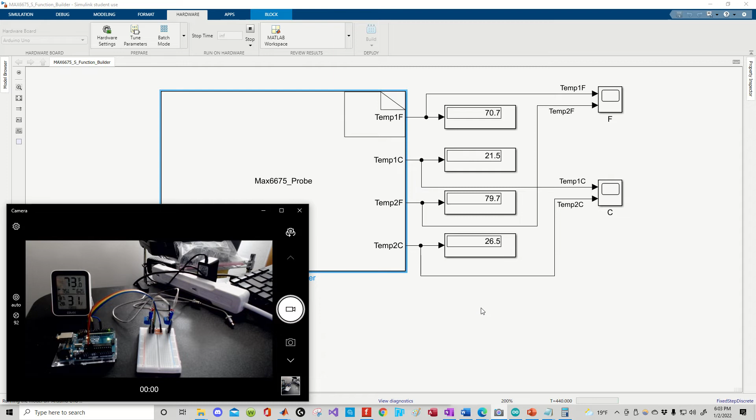I'm not going to be encompassing the calibration element within this video. I am simply going to be teaching you how to create the S function builder block in order to get the raw data in. Okay. Please note I have wired this correctly, so sit back and enjoy. All right. So how do we set this up? Okay, that's a great question. This is how we set up.

We got some wires here. They have some colors. Got your two thermocouples. Got your Max6675 stuff. You got some orange jumpers here. Got your Uno. Okay, got the working code in the background. You have your pin setup. Okay, so the jumper stuff, the orange jumper stuff, that's this. Okay, so you're jumpering the GND, the VCC, the SO, the SCK between the modules, and then the Arduino is being connected in the corresponding locations as you see.

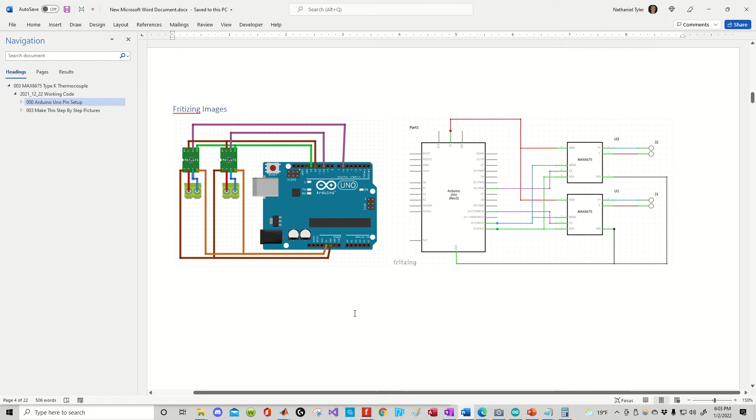These are the wire colors: brown, red, orange, green. Those are the wire colors that are doing the connections. You can understand the rest of this. Okay, here's some fritzing images. They were nice. I thought I put them in there. I like the Arduino images more, to be honest with you, so I took some more pictures and I put them in this little document. Okay, so here's some images of the orange jumpers. So SCK, SO, VCC, GND, those are being jumpered together.

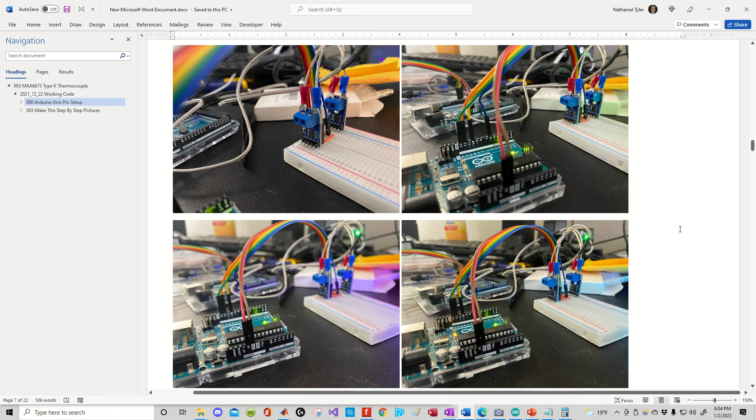And then you have your wire colors, your brown, your red, your orange, your yellow, your green, your blue, like you saw in the pinouts above. That's where the color schematic is coming in. Okay, so here's some other pictures in case you're interested. I thought everybody would like seeing these because I know I'm a visual person, so I know other people are too. And then we had to do this step-by-step thing. Basically, I said, here's my Arduino stuff. Okay, now let's put it in a text file. Let's show the one-to-one relationships.

Okay, so here's a bunch of one-to-one relationships as to how the text file that I'm creating before I dump all this stuff into the S function builder block shows up. There's an include section, there's an output section, and then there's an update section. Okay. The update section is a discrete section because it only happens once or under very unique conditions. Okay. So that's why we have to declare a discrete state of 1 when we're building the S function builder block later. Okay, so we're going to move on here. Here's your include code, here's your output code, here's your discrete code.

All right, so now we have to define the baud rate, okay, because the S function builder block doesn't let us define the baud rate in the S function block itself. So we have to actually define the baud rate in the hardware settings. So you go to hardware, go to hardware settings, hardware implementation, Arduino Uno. Under the Arduino, you have to change the hardware board from nothing to Arduino Uno, and then you go down to hardware board settings.

You drop down target hardware resources. You select serial port properties. Change the baud rate from 9600 to 115,200. Okay, and that's how the baud rate is defined. Okay, in Simulink, you click OK. Okay, and now you define the time step or the delay. And this is in thousandths of a second.

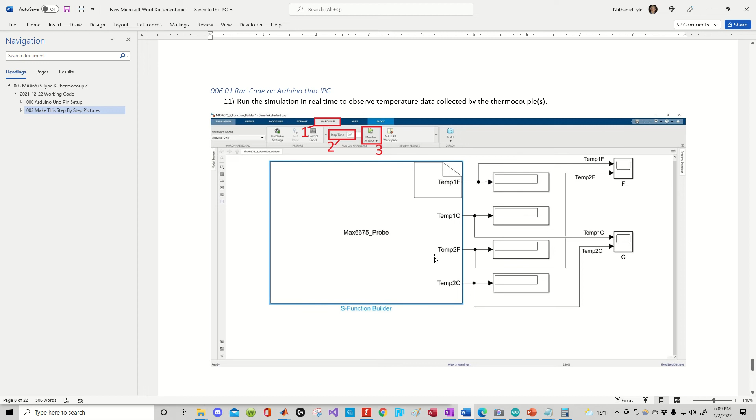You have to do this, otherwise the code will not work. Okay, now finally you go to hardware, change the stop time from 10 seconds to INF, and you click this monitor and tune button. This is very important. You have to do it this way for the Arduino Mega and the Arduino Uno. The Arduino Nano, on the other hand, you just click simulation and play. Why? I don't know. That's just the way these things work.

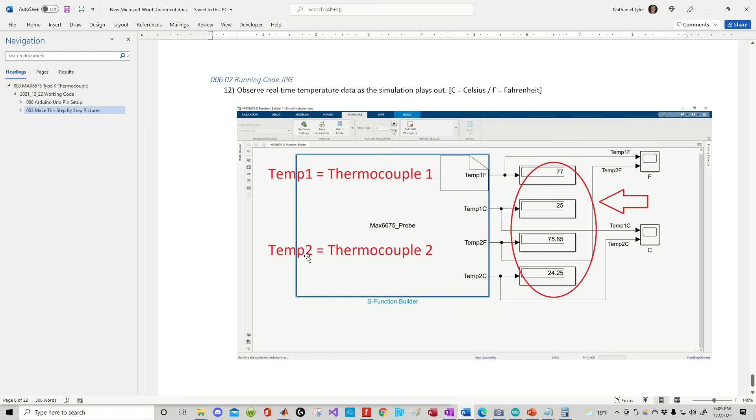Okay, obviously you've already seen the program running, so what I'm showing you here now probably makes sense by this point. Thermocouple 1 equals temp 1, thermocouple 2 equals temp 2. So here's the data that changes over time. Great. We're so happy. Now that we got all of that out of the way, and it's like 7 minutes in, let's actually build this now because I'm pretty sure everybody's really wanting this to be built by this point. So we're gonna click stop.

Okay. We're going to exit out of this. Exit out of this. Okay. Folder. Okay, so we're going to go back to the original program here. We're going to get that S function builder block code text. This thing that I said was a straight copy and paste. And I'm just going to use this. All right. And if anybody has any questions on it, they can review it or they can ask me.

Okay, so finally here at the end of the day, what I need is the libraries for this Max6675 thing. So what we do is we go into the Arduino libraries, Max6675 library master. Here's the libraries. I just pasted them right there. Great. Beautiful. Okay. I want to click Simulink, create model.

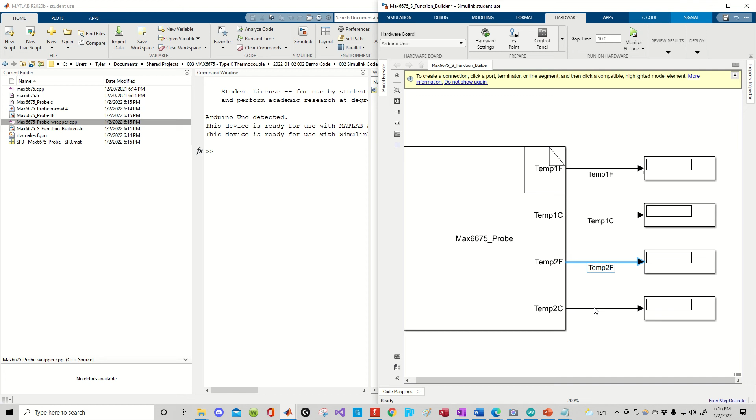Okay. Now, change this. F. Click save. Click monitor and tune. And there you go. Beautiful, isn't it? Works wonderfully.

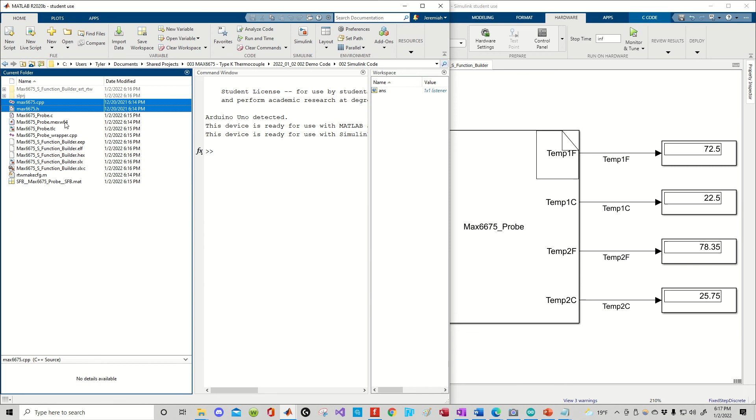So now a more advanced question is, Nate, now that this works, is there any way to call these libraries from outside? Well, that's a really good question. Now that we know this works when the libraries are included, we're going to stop this. I'm going to remove these things. We're going to go to the libraries tab right down here. Now we're going to say add path, inc path. And you remember this is the path to that library. There you go.

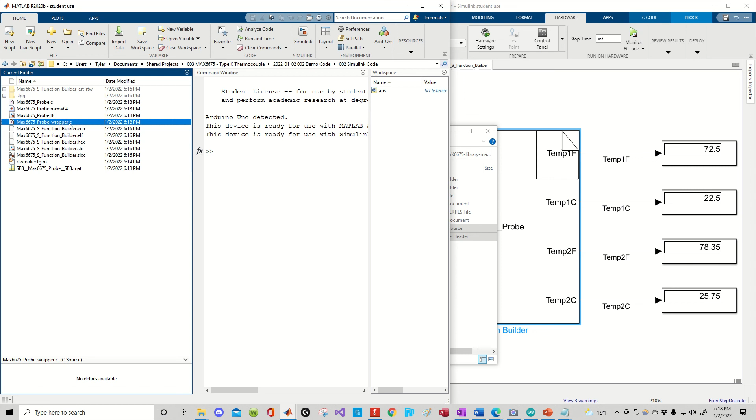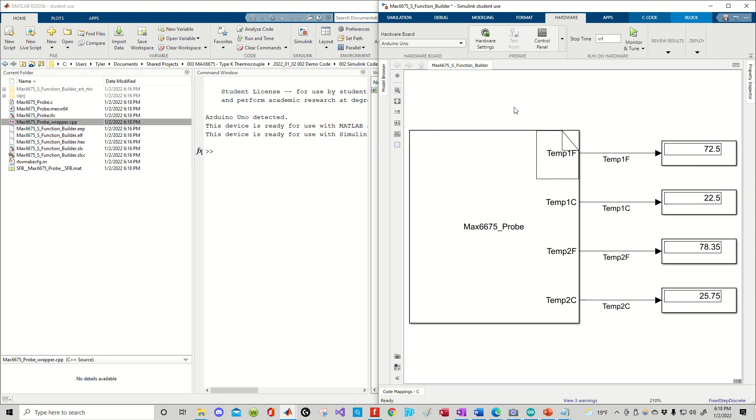Build, overwrite. So it says successfully done something. Great. Save it. Here's the old wrapper. Gotta delete that. Gotta update the new wrapper. Whoopsies. Okay. There you go.

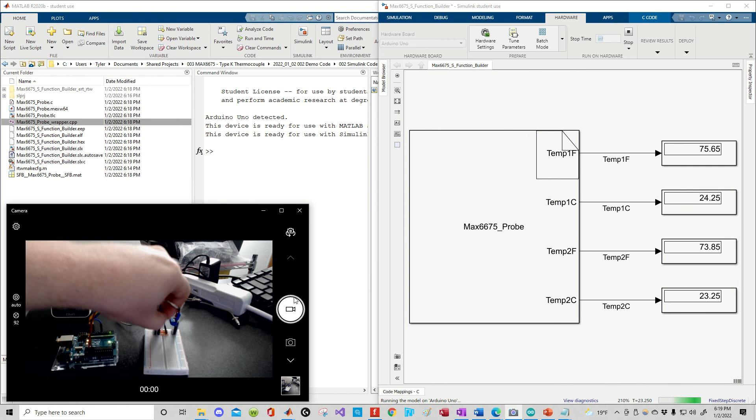Mm. Yeah. There you go. Yeah, I think that's pretty cool. So now I could do some more fancy stuff in there, call more libraries and whatnot. But at the end of the day, all you're doing is manage libraries.

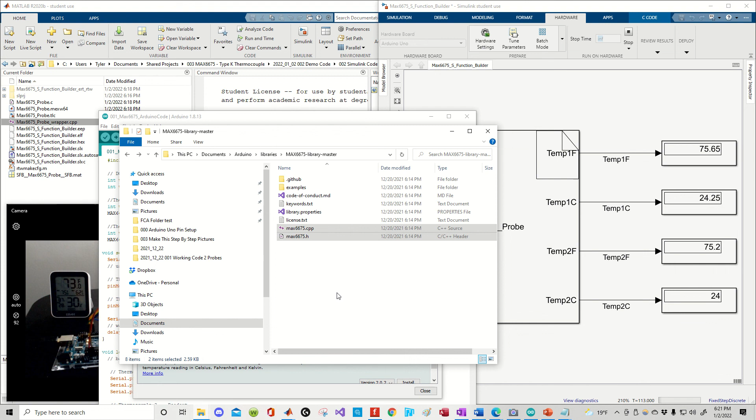Okay, installed. Yeah, right there, that one. So you just go into your Arduino libraries, you open up this Max6675 library, and bam, just copy, or you just reference that library location, which is right here. So in case this doesn't work, I will include the library itself in my tutorial file. I think this is pretty straightforward.

So at the end of the day, step one is run it in Arduino. Step two, build this S function thing, this template. Step three, go over to MATLAB and create a model. Define the hardware, define the baud, define the delay, create the S function builder, and then copy and paste this stuff into the S function. Generate the wrapper and the data and all that stuff, which is right here. And then update the wrapper.